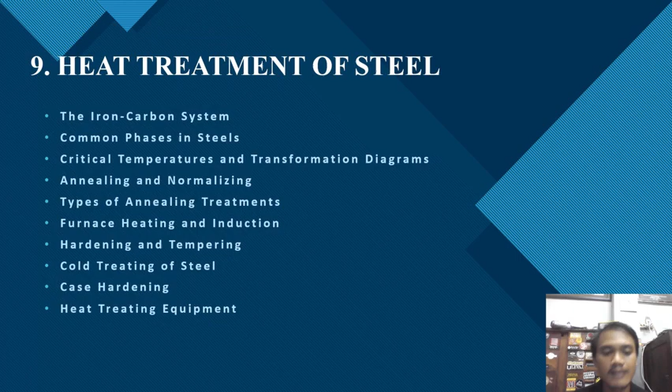So in the heat treatment of steel, there are 10 sub-chapters, and the first is the iron carbon system, common phases in steel, critical temperature and transformation diagrams, annealing and normalizing, types of annealing treatments, furnace heating and induction, hardening and tempering, cold treating of steel, case hardening and heat treating equipment. Okay, we go to the first, the definition of heat treatment of steel.

The heat treatment of steel is defined as controlled heating and cooling of a solid metal or alloy by methods designed to change the microstructure and obtain specific properties. Heat treating takes place below the solidus temperature of the alloy, and the purpose of the heat treatment is to change the microstructure and properties of the solid alloy.

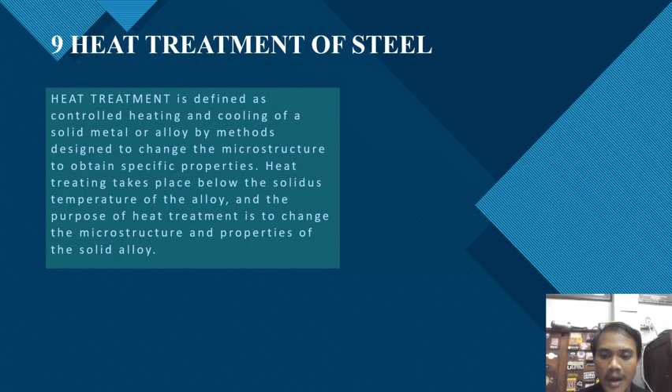Almost all metals and alloys respond to some form of heat treatment in the broadest sense of the definition, but the response of the individual metals and alloys are by no means the same. And next we go to the first, the iron carbon system. Steels are iron with a small amount of carbon alloy. Iron by itself has limited structural usefulness because it is soft.

Like most pure metals, one way to increase the strength of pure metal is to add appropriate alloying elements for solid solution strengthening. A more significant role of carbon is its effect on the formation of an iron phase called austenite. Iron is an allotropic element, which means that iron atoms change their crystal structure at some specific temperatures, known as transformation temperatures.

Under normal conditions, austenite cannot exist at room temperature in a plain carbon steel, but only at elevated temperature within the austenite area, or we can say gamma, bounded by the lines AGFED. And the austenitizing of steel is the first step in several different types of heat treatment, and the various kinds of transformation structures that occur when steel is cooled back down from the austenitic phase determine the resulting properties of steel.

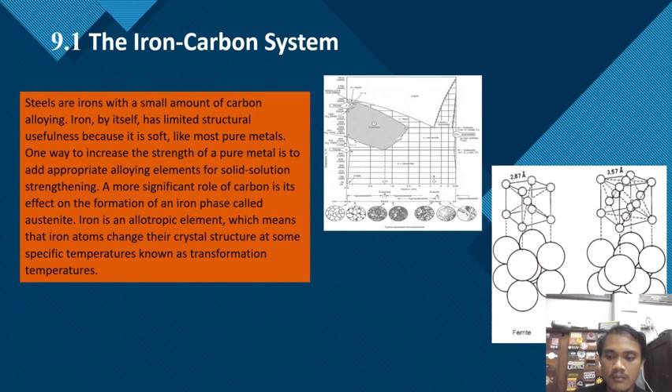Next, we go to the common phases in steel. Heat treatment of steel requires an understanding of both the equilibrium phases and the metastable phases that occur during heating and or cooling. For steel, the stable equilibrium phases include ferrite, austenite, graphite, and to some extent cementite, as a very stable iron carbide. The metastable phases are pearlite, martensite, and bainite.

So here we have three subsections. The first is cementite and pearlite formation. For cementite and pearlite formation, the equilibrium iron-carbon phase diagram applies when the temperature is held constant or when heating and cooling rates are slow enough to approximate equilibrium isothermal conditions.

And here we can see eutectoid steel and pearlite formation. The eutectoid point on a phase diagram is the solid state version of the eutectic melting point. Like a eutectic transformation during solidification, a eutectoid point on a phase diagram is where a single solid phase transforms completely at one temperature into a mixture of two or more totally new solid phases.

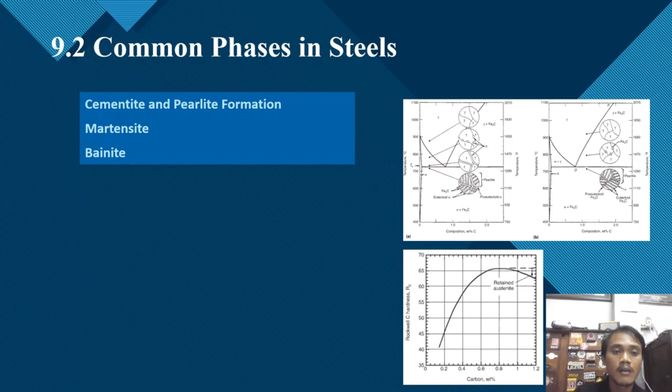Next we go to the third topic, critical temperatures and transformation diagrams. The critical temperatures of steel define either the onset or completion of a phase transformation. Three important critical temperatures in steel heat treatment are: A1 is the critical temperature for the start of the transformation to austenite, the so-called eutectoid temperature,

A3 is the transformation into 100% austenite. The Acm critical temperature is the high temperature boundary of cementite in solid solution with austenite in hypereutectoid steel, with carbon over 0.77%. So in table 9.3, we can see here the definition of critical transformation temperatures in iron and steel. With the code Arcm, in hypereutectoid steel, the temperature when cementite begins to precipitate during cooling of the austenite-carbon solid solution.

Next, the transformation diagrams: the kinetic aspect of phase transformation is as important as the equilibrium diagrams for the heat treatment of steel.

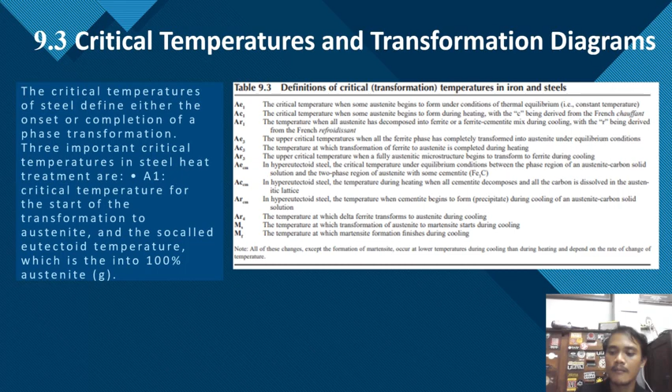Next, we go to annealing and normalizing. Heat treatments are not limited to just hardening and tempering. Various annealing methods are useful in developing a more uniform microstructure and other combinations of properties such as ductility, formability, and machinability. General annealing thermal cycles.

In annealing, the annealing temperature may be classified as: first, subcritical annealing below the lower critical temperature A1; intercritical annealing above A1 but below the upper critical temperature A3 in hypoeutectoid steel or Acm in hypereutectoid steels; and third, supercritical annealing to achieve full austenitization of either hypo- or hypereutectoid steel.

And there are seven rules which may be used as guidelines for the development of a successful and efficient annealing schedule. All of the rules are important for success.

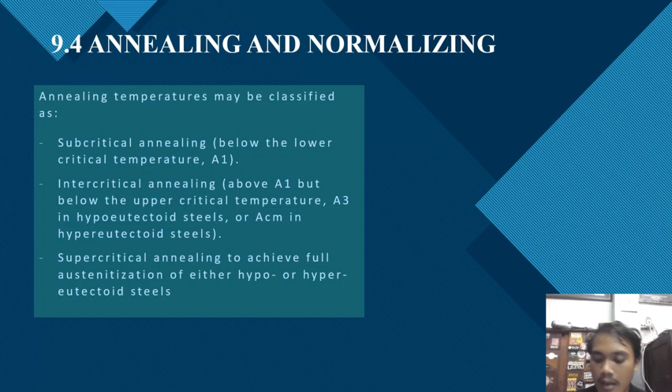Next we go to the types of annealing treatment. The types of annealing treatment have various metallurgical purposes such as stress relief, recrystallization, and spheroidization. The figure also includes the temperature regions for the normalizing of steel, which is a heat treatment to improve the uniformity of steel microstructure.

In the types of annealing treatment, we have stress relief annealing, annealing at subcritical temperature below Ac1, which includes different temperature regions. The second is recrystallization annealing. When cold worked metals are heated to a sufficiently high temperature, the badly deformed cold worked grains are replaced by new strain-free grains.

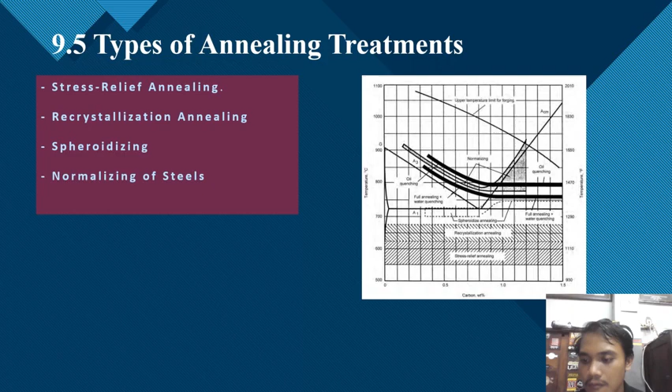Spheroidizing: depending on the time-temperature exposure of a steel, the cementite carbide in a steel can form different morphologies. And normalizing of steel: steel is normalized to refine grain size, make its structure more uniform, make it more responsive to hardening, and improve machinability. And we go to the sixth part, furnace heating and induction.

Heat treatment of steel involves a wide variety of methods for annealing, normalizing, hardening, and tempering. Fuel-fired or electrically heated furnaces are used in a wide variety of configurations with various media. Heat-treating furnaces can be generally classified as either batch or continuous furnaces. In a batch-type furnace, loads are placed in the furnace and brought up to temperature together. Depending on the process, the furnace may or may not be cooled before it is opened and the load removed.

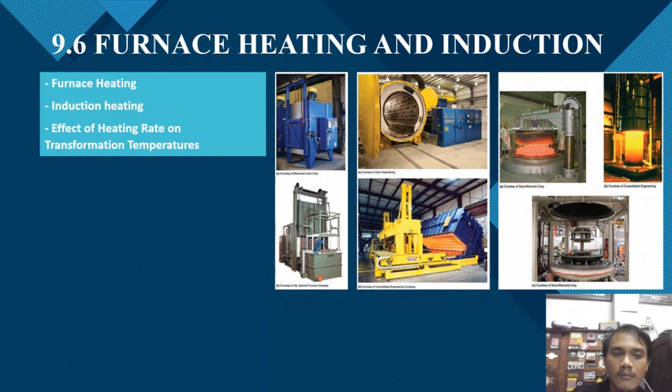Next, we go to the hardening and tempering. The hardening of steel involves a 3-step process of austenitization, quenching, and tempering. Sometimes an additional step of cold treating is done at low temperature below the martensite finish temperature of the steel.

Quenching refers to the process of rapidly cooling metal parts from the austenitizing or solution treating temperature, typically from within the range of 815 to 870 degrees Celsius, which is 1500 to 1600 degrees Fahrenheit, for hardening medium and low carbon steel, to temperatures as high as 1232 degrees Celsius, which is 2250 degrees Fahrenheit, for hardening specific grades of high-speed steel.

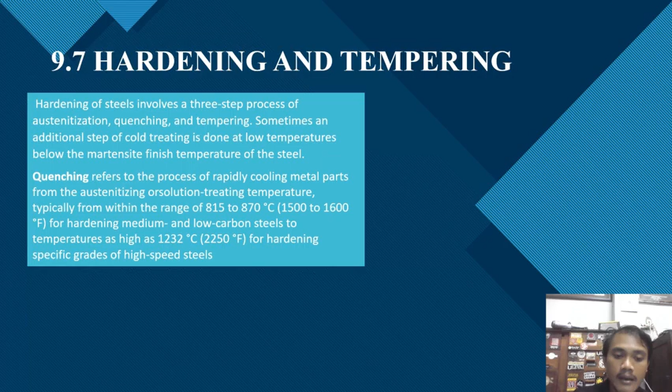In the quench media, successful hardening usually means achieving the required microstructure, hardness, strength or toughness while minimizing residual stress. Tempering: hardened steel can be tempered to reduce hardness and to increase toughness. And next, we go to the cold treating of steel.

After hardening, some alloys retain a significant amount of austenite that does not transform to martensite. A good example of such a grade is D2 tool steel. It is not unusual for D2 to have as much as 20% retained austenite after undergoing standard heat treatment.

And here we can see the equipment for cold treating. A simple home-type deep freezer can be used for transformation of austenite to martensite. Temperature will be approximately minus 18 degrees Celsius or 0 degrees Fahrenheit. In some instances, hardness tests can be used to determine if this type of cold treating will be helpful.

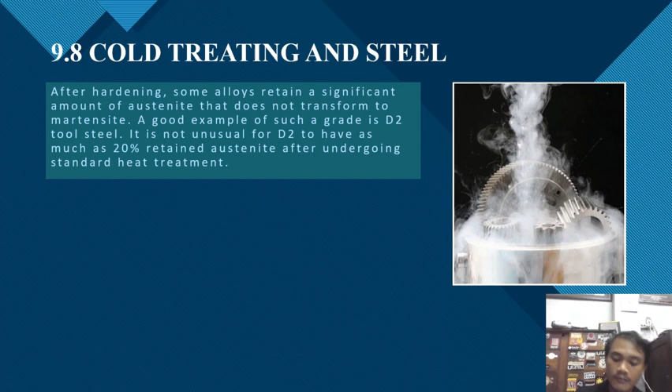And the next is case hardening. Case hardening is the generic term used for several processes that put a hard, wear-resistant surface layer on a part. There are two distinctly different approaches to the various methods for surface hardening. The first is the overlay and coating method, that involves an intentional build-up or addition of a new layer. And the second is surface treatment, that involves surface and subsurface modification without any intentional build-up or increase in part dimension.

In here we have two subtypes. The first is diffusion methods of case hardening. Surface hardening by diffusion involves the chemical modification of the surface. The basic process is thermochemical because some heat is needed to enhance the diffusion of hardening species into the surface and subsurface region of the part.

And the localized hardening process: one way to produce a part with a hard surface and relatively soft core without altering composition is to use a steel with low hardenability, like one that does not have through-hardening capability. Other techniques include shell hardening, flame hardening, and induction hardening.

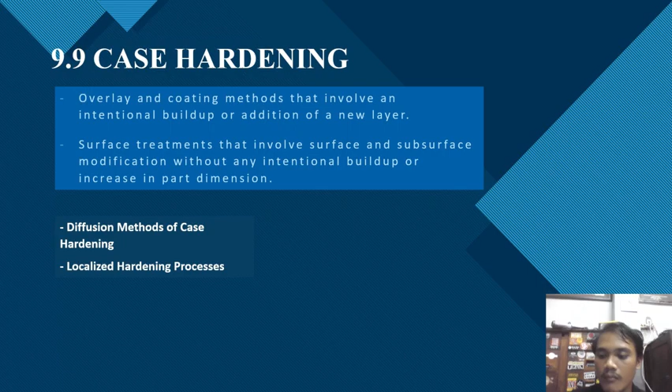And the last part is heat treating equipment. In simple terms, industrial heat treating furnaces are insulated enclosures designed to deliver heat to workloads for thermal processing. Basic elements of construction include an outer shell, refractory walls, hearth, roof, a source of heat, electric or combustible fuel, and means of loading a workload, moving it through the furnace if necessary and removing it.

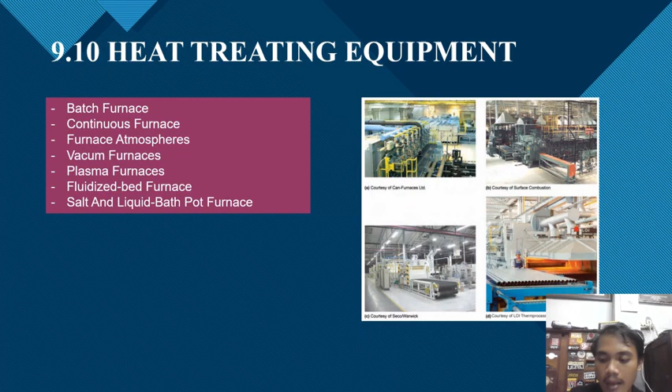And last is the salt and liquid bath pot furnace. A bath of molten salt or metal can be used for both heat treating and heating applications. Pot furnaces are unique in that the media being melted is the source of heat for this operation. Heating in a molten metal, usually lead, is an age-old practice.